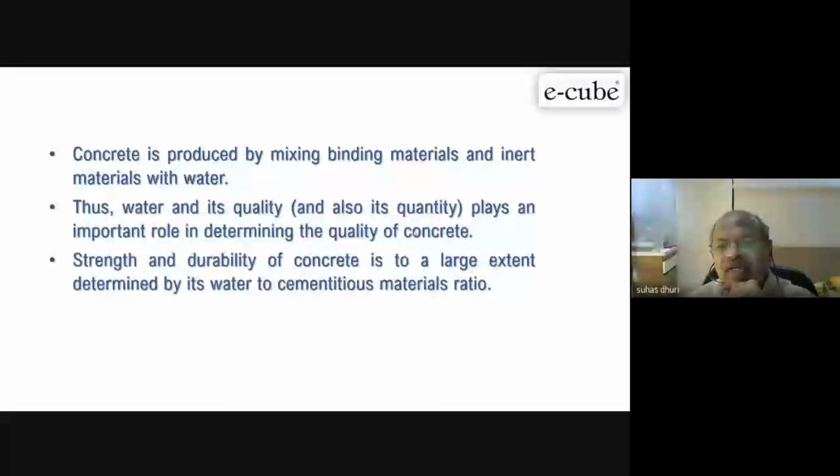Now, why is water required? Generally, when you add water to cement, it makes a paste. And that paste basically covers all the particles available, from fine aggregate to coarse aggregate, coated by the cement paste. So that is very important. Once that coating is perfect, you get very good strength.

The coating also needs to be of minimum thickness - we should not have it very thick. That's why we say you have to use very optimized cement content or optimized water content also. You should not use it very dry, nor very wet.

So the quantity of water decides based on your workability requirements as well as source materials - right from 150 micron to say 20mm, we have various sizes covered in aggregates. All the particles have to be coated with the cement paste or cementitious system paste. For that, a particular water content is required.

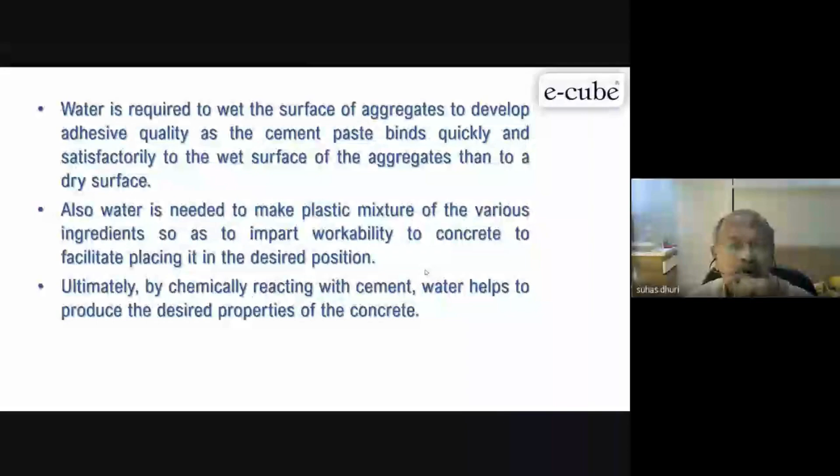So water content depends upon your workability requirement and also depends upon the grading and shape of your materials, because shape decides the surface area of materials. When surface area is more, you need more water. If surface area is less, you need less water for the same workability. So you have to remember this, and accordingly we have to make adjustments during the production of concrete.

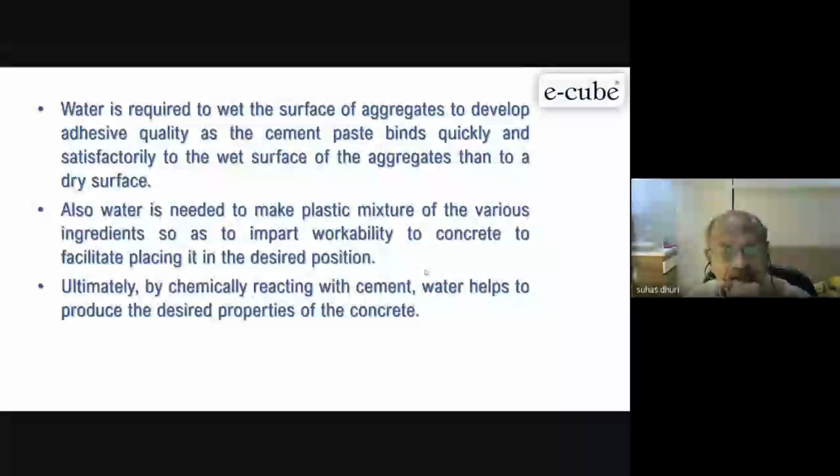This is very important. As I said, cement and water chemically reacting helps to produce desired properties of concrete, both in the fresh stage as well as in the hardened stage.

Now, when you are talking about normal sites where facilities are not very high, we are working on volume batching. Though we have batching plants in cities, sub-cities, or metropolitan and second cities where all batching plants are available, where small sites are there it is very difficult to have a batching plant because quantity is very small. So we produce site mix concrete, where batching is not given that much importance.

So quality of water is neglected, very highly neglected at the sites. That is our observation, and it affects the durability of the final product. How is it affecting? We'll discuss that.

So commonly accepted for anything is potable water, meaning water which is suitable for drinking purposes can be used for mixing as well as curing. One thing to remember is, as a simple taste test, you can drink the water and see if it is easily drinkable, because sometimes some salts are there which give a different taste that is not suitable for drinking but may be suitable for concrete.

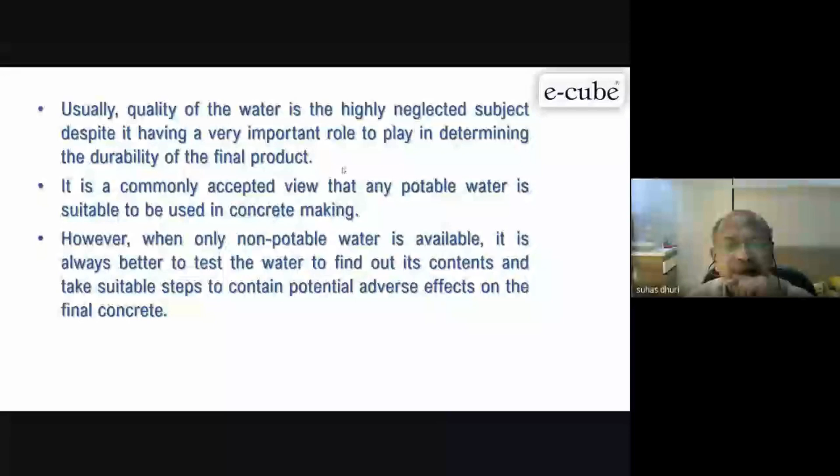So one has to see that the water used in concrete meets requirements. Now in my lecture I am giving some IS code numbers that you need to write down, and go through those codes, because they are very essential when you go to the site. So these references are very important.

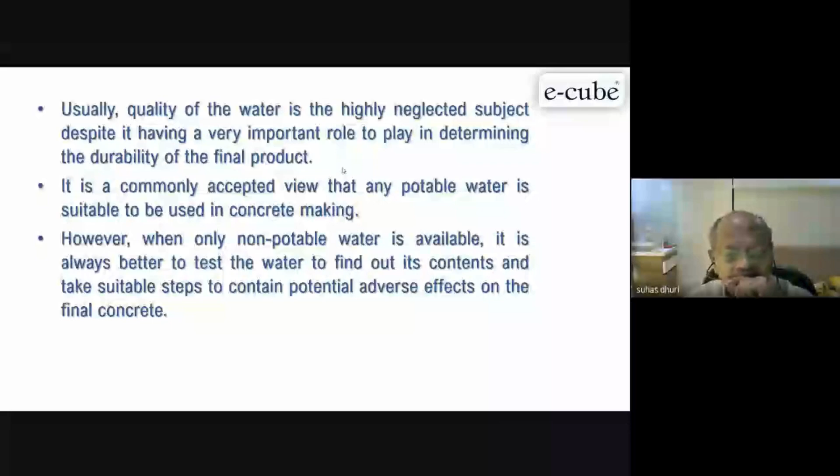Now there is a possibility that a lot of salts or other material is available which give an adverse effect on the concrete properties, both in the fresh properties as well as hardened property.

Now for pH value they have given a range that I will show you. Algae is also to be avoided because it may give air entrainment in the result, causing loss of strength. Whatever air enters into the concrete will reduce its strength by a certain amount.

Seawater is not allowed for RCC. We can use it for PCC, but seawater also contains salt that will give efflorescence on the surfaces. Though it is reduced and limited to 15%, for RCC it is not allowed to use any seawater. We have seen in Mumbai a lot of project people use whatever water is available from nearby ponds, and they get a lot of issues in the concrete because all such water contains chlorides, and chloride is ultimately responsible for corrosion of the steel.

Once corrosion starts, it is very difficult to stop. It's like a cancer for the concrete. We can prolong it with some system or some repair work, but we cannot stop it completely. We have to avoid it initially by checking against the certain limits given in the IS code. Accordingly, I have to check the water and only then use it for concrete. Otherwise, it is very difficult to repair afterwards, and it's not possible to go 100% back to the original position.

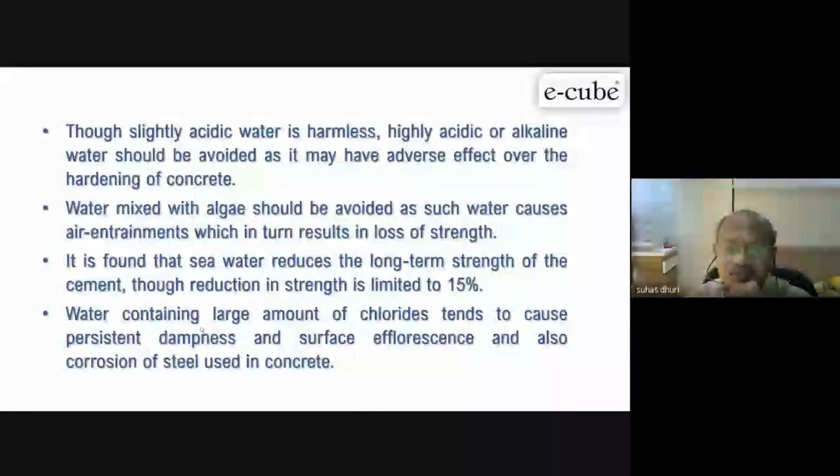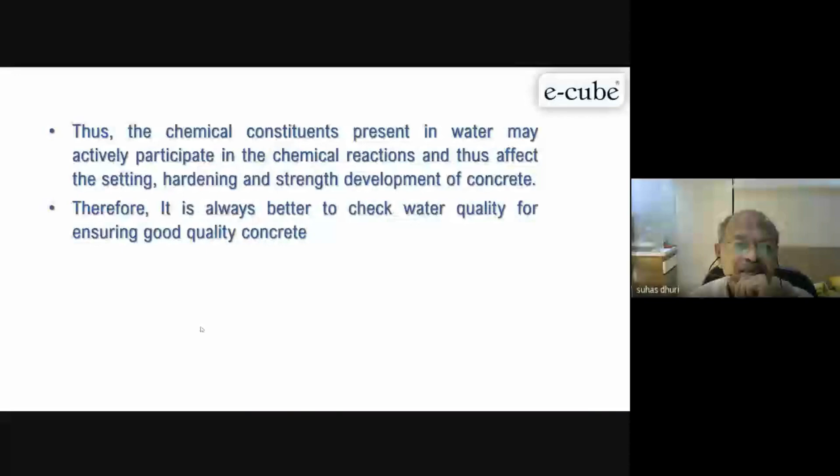So the chemical constituents present in the water may actively participate in the chemical reaction, and that affects the setting time, hardening process, and strength development of the concrete. You should always remember all three effects. There is also an issue of hardening, in the sense initial hardening and setting refers to your workability requirement also. Sometimes with some water you will find it has set suddenly without any issue. So that one wants to understand.

Therefore, it is always better to check water quality for ensuring good quality concrete. Now the question will come: how to test this water at site? Is there any possibility to check? Because water testing is always a chemical analysis, and chemical analysis is a very big process. So you have to send water to the laboratories to get it tested, but by the time the report comes, you have already consumed the concrete.

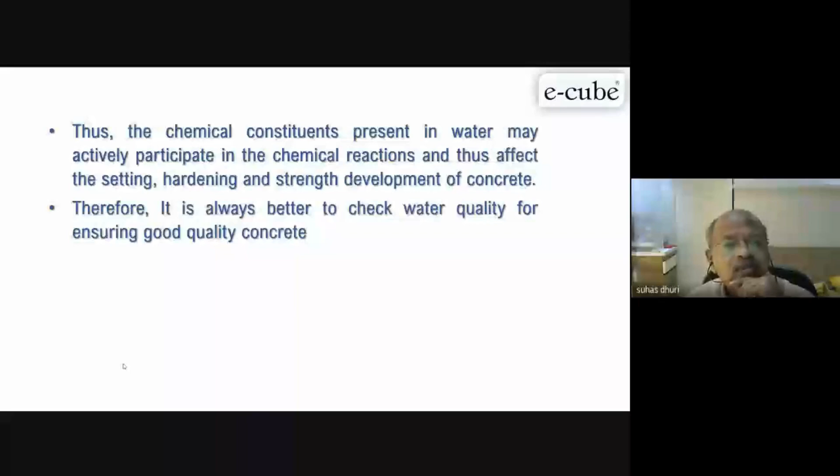So you have to plan properly before proceeding for testing. At least get the source approved first. For the source, whether it's a well or whatever water is coming, you go there and collect the sample personally, or send your representative who can collect the water sample from the source itself. Otherwise, the supplier may play with the sample. That is happening at various sites, so one has to be very careful to get a proper water sample.

Now, why do you need water in concrete? There is a chemical reaction with cement, and next is workability. These two are the prime requirements for needing water in concrete.

Now if you see in reality, the hydration process we discussed earlier with cement needs hardly 25% water. So a water to cement ratio of roughly around 0.25 is sufficient to hydrate the entire cement paste, all the cement particles available. Now additional water, when working at site, we add maybe 0.4, 0.45, 0.5 ratio. So we're adding almost double the water, so what happens to the water that doesn't take part in the reaction?

That remains in pores or air bubbles in the hardened concrete, resulting in very porous concrete. So porosity is very high, permeability is very high, and you'll have very bad durability and strength. Some amount of water is good for preventing plastic shrinkage cracking, which we'll discuss when covering fresh properties. That's why we always say water has to be optimum.

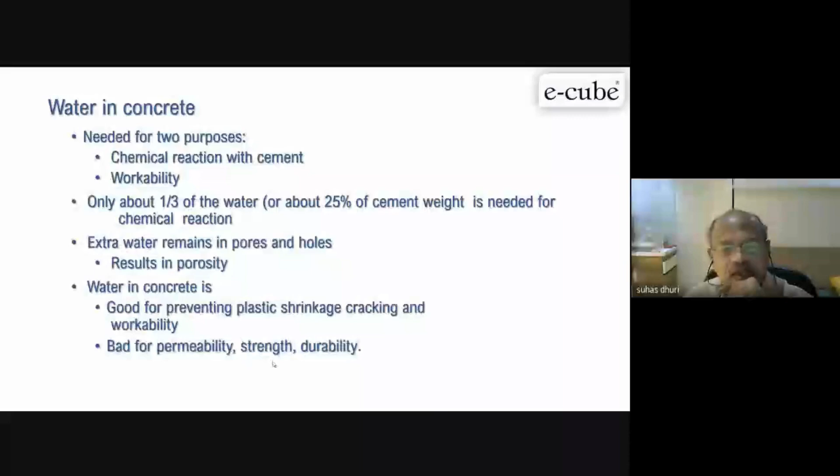So there you adjust your water requirement because cement cannot be changed. If one bag has gone and we know it is 50 kg, water has to be controlled at optimum content for the required workability. That one has to understand and proceed for concrete production. It's very, very important. Otherwise, you get very high permeable mix, strength is lost, and also you lose durability.

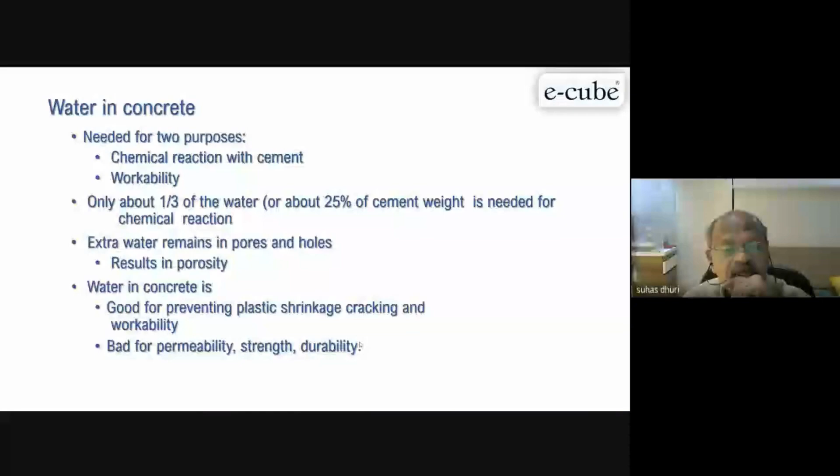So the basic purpose of having a good structure, though you may get very good strength because today the quality of cement is excellent, you get the strength, but it is permeable. Then there is loss of durability, and it will not have sufficient design life of the structure. So we have to always use optimum quantity of water content.

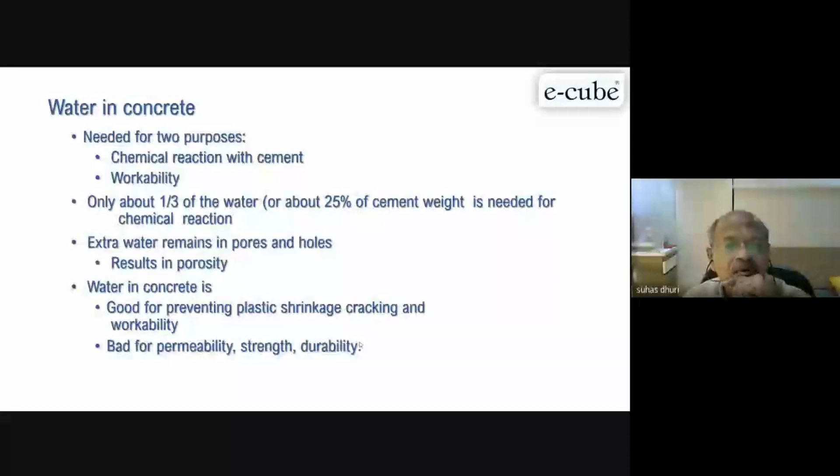This is what we have discussed. Excess water is creating bleeding, basically. It also gives very good cohesion if you have optimum water content. If you have excess water, you'll find that the bigger aggregate particles are going away from the concrete. It's called segregation.

So when you place such concrete in the structural member, what is happening is you get aggregate at one location and cement paste at another location, a very thick layer of cement paste. That's called segregation, and we'll have different components in the same column or beam, whatever is there. So the bottom will have only aggregate, the top will have only paste. Then the distribution of stresses will be different.

So we have to avoid segregation and excess water or excessive bleeding. Bleeding we'll discuss in fresh properties, what is really bleeding, what are the tests for bleeding, that also we are going to cover.

So optimum water use for better quality of concrete, provided it can be consolidated properly. Optimum in the sense, whatever concrete you produce, you should have proper workability so that you can transport, place, and compact it properly. Otherwise, we will get a very harsh mix or very stiff mix, which is difficult to vibrate and achieve better compaction.

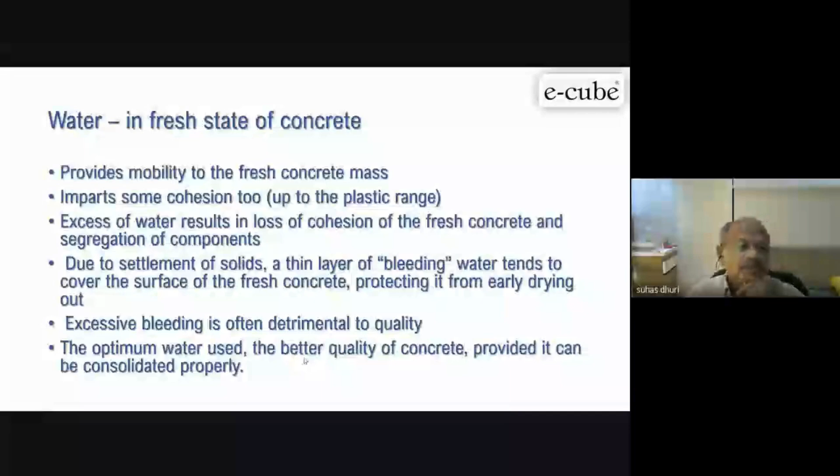Also, concrete has to be pumped because now around 90% of concrete in Mumbai or any major site which is coming from RMC, we are doing by pumping. So pumping also requires a certain amount of flow or slump. So we have to keep that in mind, and accordingly adjust the water and admixture dosage. Then only is it possible to get proper concrete in the structure.

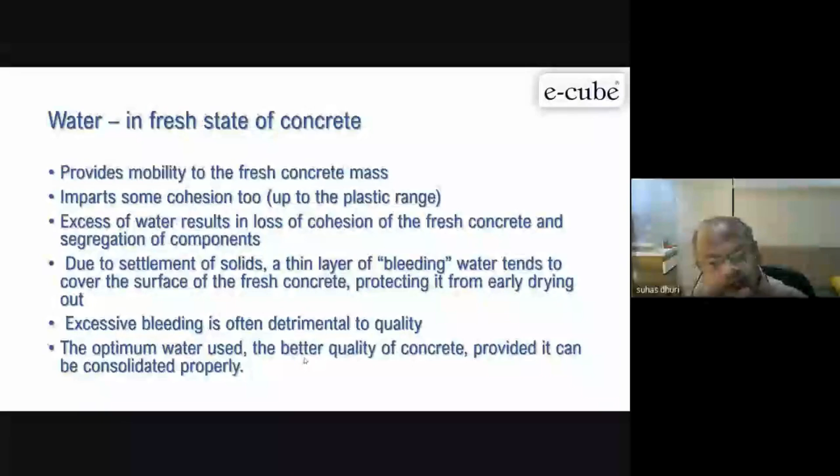Now, what are the impurities in this that interfere in the hydration of cement? One is organic matter, and then chlorides and sugars. Now, sugars always give a delay in setting. Your normal sugar also, if you add it in concrete, you will find the concrete is delayed. It will not set for even 24 hours. So sugar is not advisable for having better concrete.

Then chlorides, as I said, chloride also gives an effect on your durability, and chloride is also a very good accelerator. Suppose I have to accelerate the concrete setting to achieve early strength, we can add chlorides, but that is in plain concrete. If RCC is there, we cannot use chloride-based accelerators. So in the market, a lot of accelerators are available, and if you check, there's always a note written that these are chloride-free accelerators. There are a lot of other accelerators also available. The cheapest accelerator is chloride, meaning you can add salt and get early setting, but that is not advisable to use in your RCC structure, reinforced cement concrete.

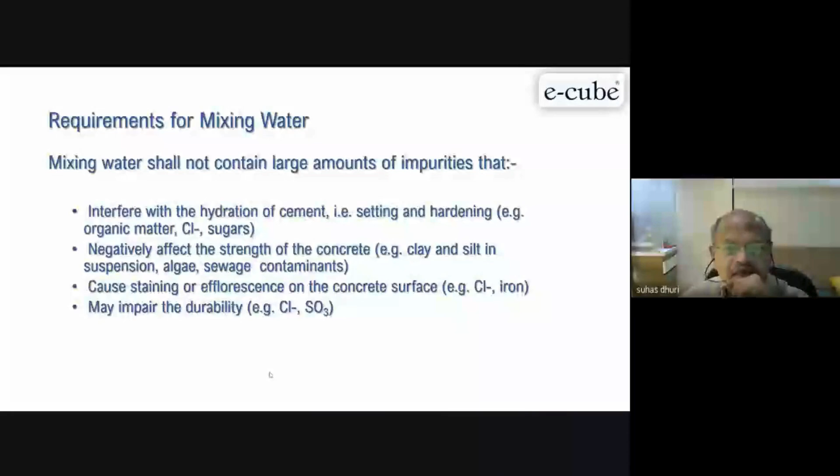Now any salt coming in can cause staining on concrete, or you get efflorescence. You must have seen some concrete outside walls where we can see white patches. So water is coming by capillary action, the water evaporates, and salt remains on the surface. That is your chlorides or iron, and you can see brownish stains in concrete. In most old structures where corrosion has taken place, the ferric oxide is dissolved and comes to the surface. So it is affecting your durability. That we have to understand very carefully.

Now this is also under revision. Maybe within few months the new revision will come, because it is 2000, already 20 years are over now, and we have changed concrete drastically for the last 10-15 years. So now they are going for revision of the code, like other codes also they are revised. 456 also under revision, now under discussion. So I think slowly it will come.

It is basically a code of practice. So all civil engineers should have the copy of IS 456. They cover everything right from material to design, everything is included in this. And this is what everybody is following for the construction industry. A lot of other codes are there which we will subsequently know. But this is one of the very important codes. Everybody should have a copy of that code.

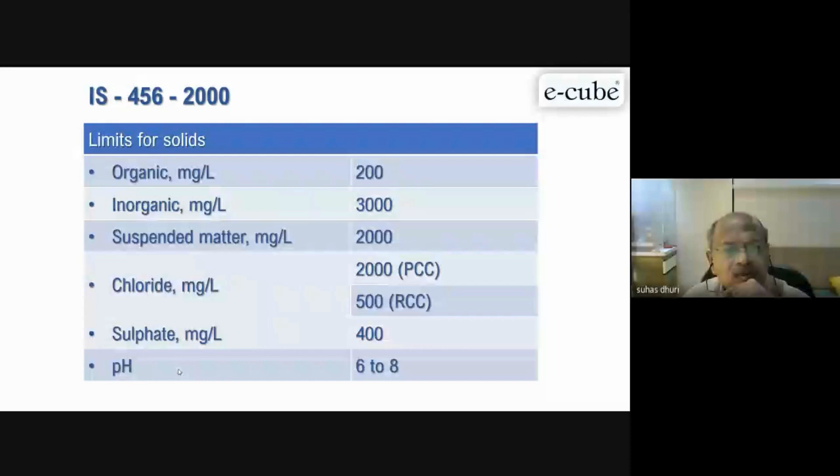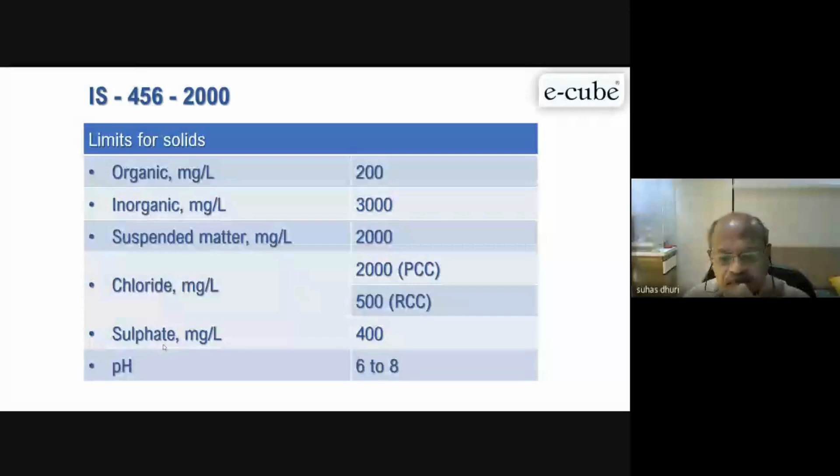So it's advised to have that water testing kit, a portable water testing kit. You should have it at site to check regular samples, and every 3 months or 6 months send it to a third party to cross-check your results. Because that testing is very essential and important.

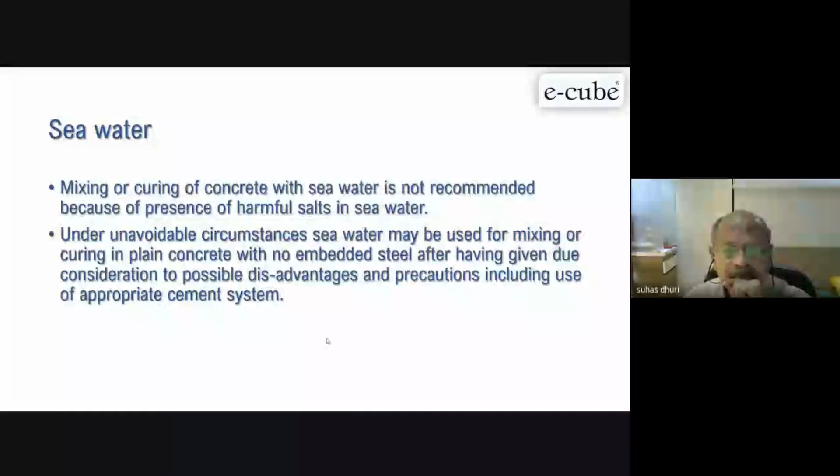As I said, seawater is not recommended for RCC, but for PCC definitely we can go for it. If it is unavoidable conditions and you have to make concrete, you can go for plain cement concrete, not for RCC.

So water which is suitable for mixing, which is satisfactory for mixing, can be used for curing also. Because in curing also we are making wet concrete, always keeping the concrete wet. What is curing? We'll come to that when we talk about hardened properties of concrete. So curing has to maintain the moisture within the body of concrete, that is required curing.

So that water is also absorbed by the concrete, some amount of water. So you may get a lot of stains on the surface if the water is not suitable for use in concrete. So water for mixing and curing - the water which is suitable for mixing can be used for curing. That means if tannic acid is there, iron is there, you can see those stains in the concrete.

Then we'll understand if there is any issue in concrete, maybe some issue is with your curing water. Because people think curing is only to cure the concrete and they can use any water from a nearby pond, and they will find these issues coming up. Because here in Mumbai, if you dig any pond, you will get only seawater because we are very near to the sea.